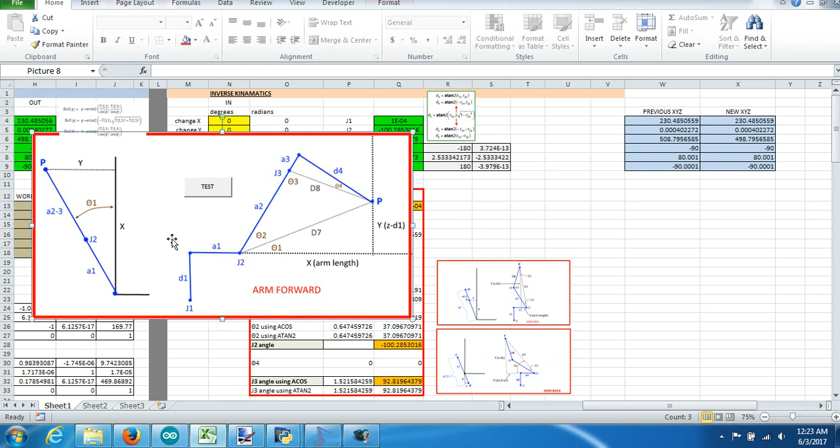So, move somewhere where it's not on the bottom. So this is kind of a wireframe version looking at our robot. If I'm looking straight down at my robot in this picture, I can see here's the center of J1. And if my robot is over at point P, then it's pretty easy to do some basic math to figure out what J1's angle should be. I can just use Pythagorean theorem, use X, use Y of my position. So J1, that one's super easy to get. I can get that pretty much no problem.

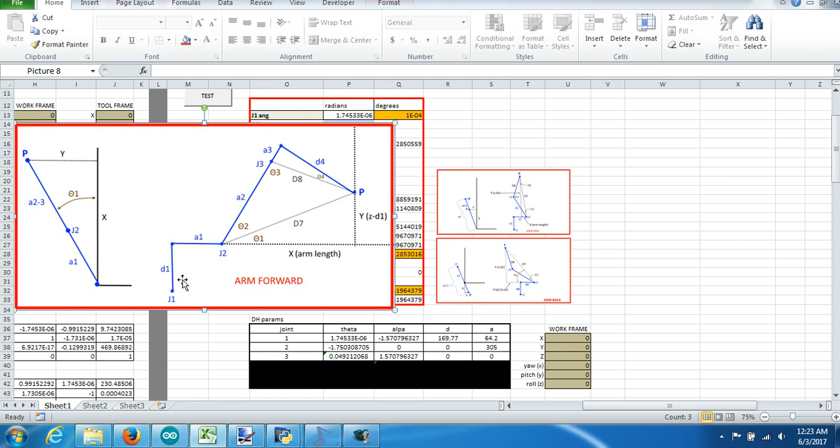Getting joints 2 and 3 is a little bit more difficult. I have to do some similar math, but now we're going to look at the wireframe model of the robot from the side. So if this is point P out here, then given that position, from this math equation earlier, we know that the x value is this arm length here, and then we can use various equations to figure out each of these different triangles.

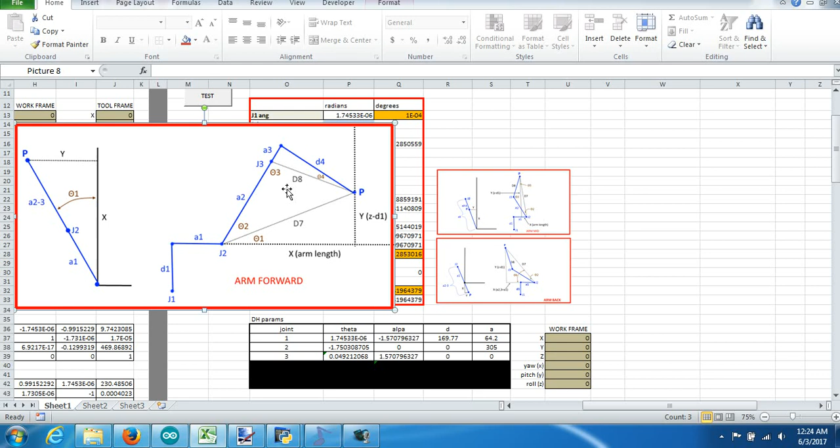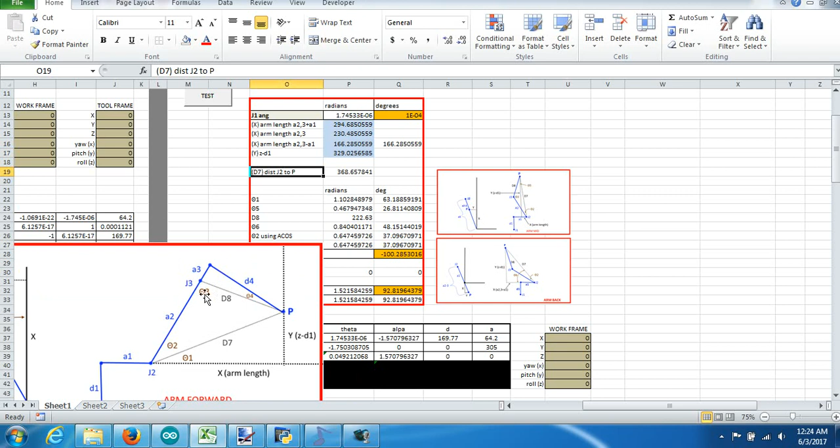Now I could probably spend a lot of hours going through every one of these formulas, but I'm gonna kind of breeze through this and just touch on it, because you can open up this Excel spreadsheet and look at each one of these. I have them all labeled so they match what's in the pictures here, and you can see how each of these angles is calculated. But before we get into any of this, I wanted to go through each one of these pictures, because there are different arm configurations. The math changes based on where the arm is.

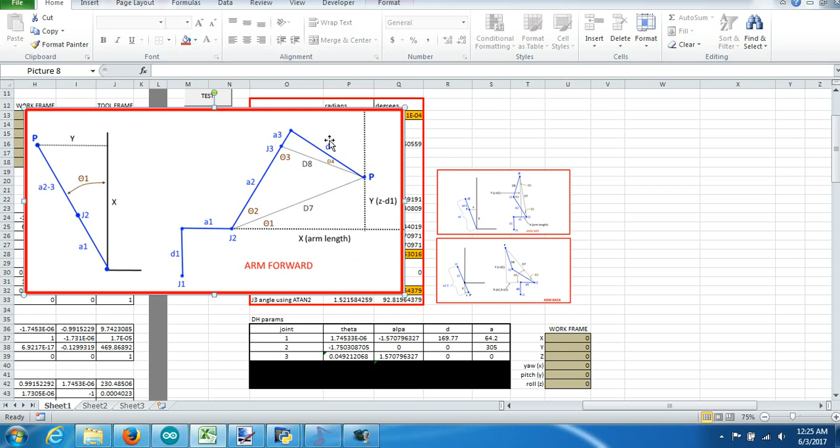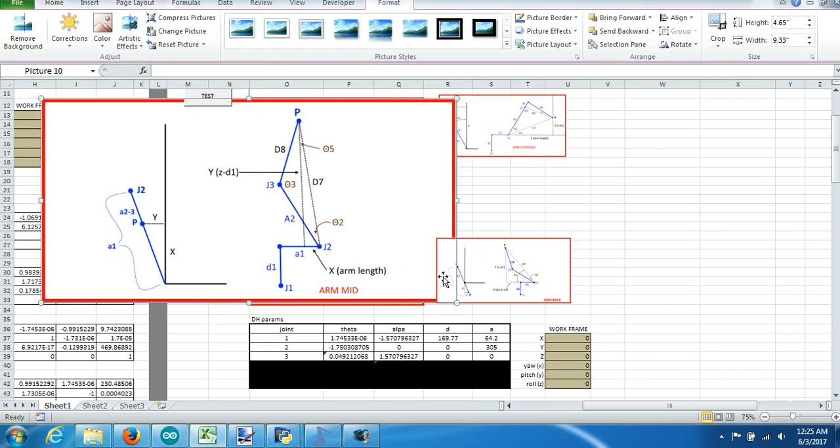So this is arm forward. With this model that I came up with, this is with axis 3, and basically the elbow and the wrist are out forward in front of the robot. So that's the forward configuration. The next one, let me blow this one up. So this one is arm in the mid position. It's a similar calculation, it changes a little bit, but the center point of the robot is now behind J2. You can see that straight line coming down. In this arm mid configuration, P is now behind J2, so that makes the math for finding all these different angles a little bit different.

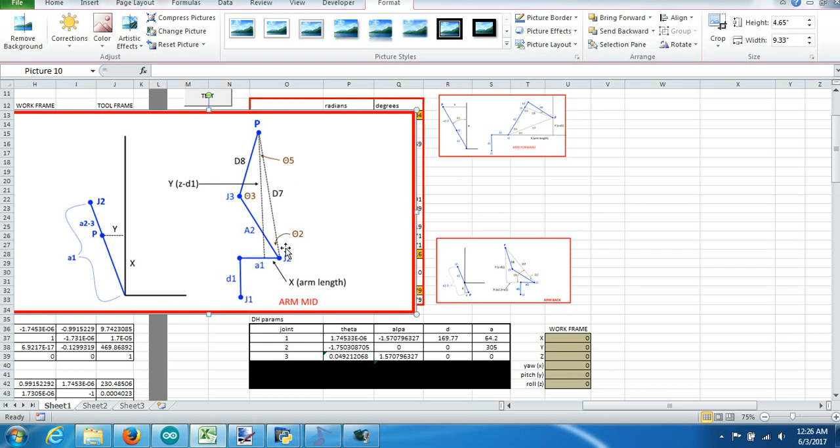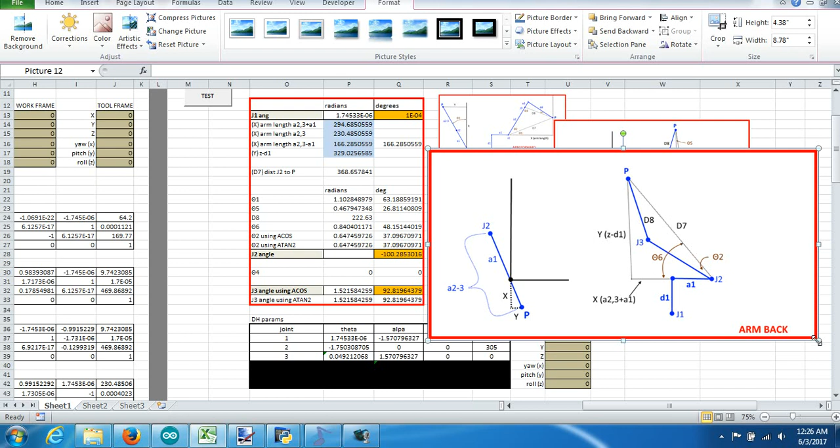And then over here, this is the arm back configuration that I came up with. Finding J1 is similar, just that you're going to find the X and Y over on this side this time. And then with the arm back, you've got P and J3 now behind J1. So now I've got a bunch of different triangles to solve for. You can see they're all marked here with theta 6, theta 2, D7, D8, J3. So you can look at these wireframe models and dig through all the math that I've done here, given that they're all labeled the same as the picture.

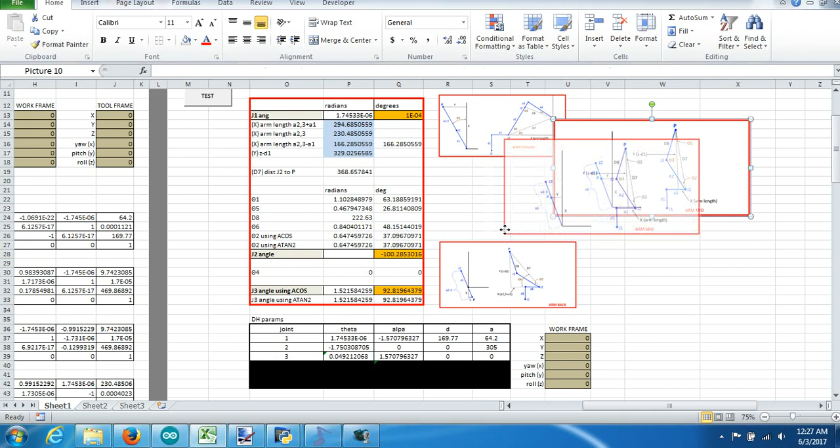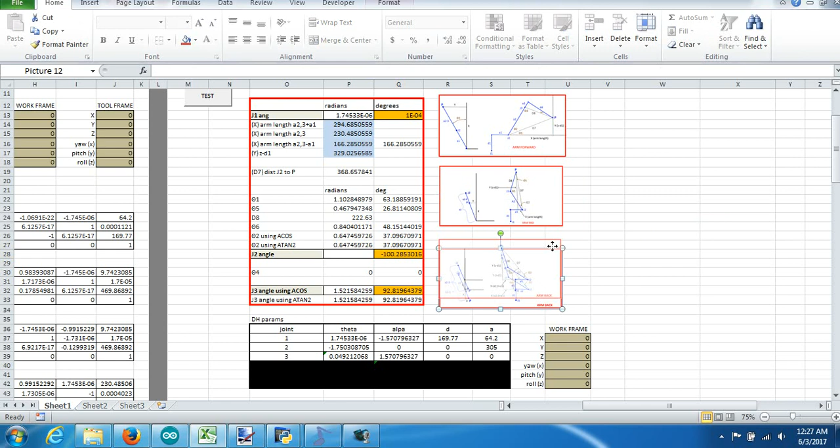One thing to consider here is these are just 3 arm configurations. What I did not do is an elbow back configuration. I didn't want to go to the trouble, and I've never had a need to run the elbow back. The elbow back configuration is if you were to take J3 and bend it backwards like that. That was a lot more complexity into the math, and I was just trying to get it working.

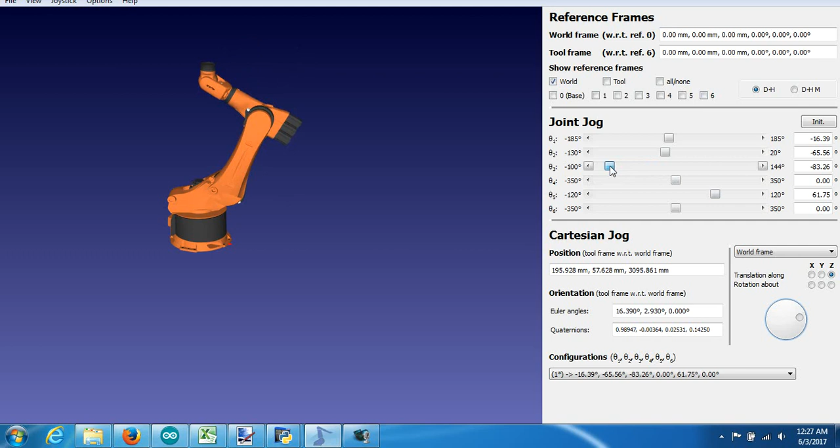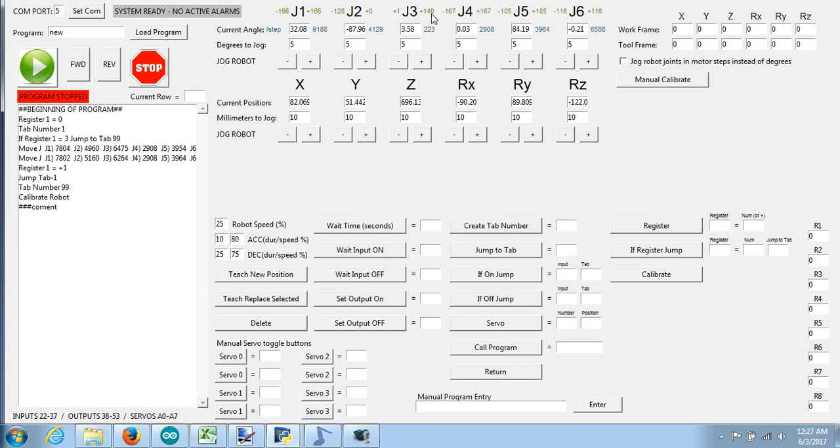So there is no arm back configuration, and you'll see in my program that the limit on J3 is +1. I don't let it go to 0. 0 is a no-no without doing some other calculations. So we got 1 degree all the way to +140, a reflection of the fact that I didn't do an arm back configuration in my robot. The other thing to consider is another value we need to know: the quadrants that the robot is in.

So over here, let me go up, find it. So these quadrants for J1, J5. So this quadrant basically calculates either quadrants 1 or 3 based off of, let's see here, excuse me, let me back out of there. So these quadrants are the way I split it up to be able to tell where the tool center point was in. So I have quadrants 1, 2, 3, and 4 for J1. That's how I tell which way the robot's pointed, whether the value is negative or positive for the J1 axis.

So for example, if my degrees are at, let's say, +5, I'm in quadrant 3. If I go to 95, I'm in quadrant 4. So in the world we live in, this is quadrant 3 for the robot, this is quadrant 4 for the robot, assuming that, let me center that, assuming that this square here that I'm drawing is the world that the robot lives in, and the very center is the center of the robot. When the robot arm swings over into this quadrant, that gives it quadrant 3. When the robot arm swings over into this quadrant, it's 4.

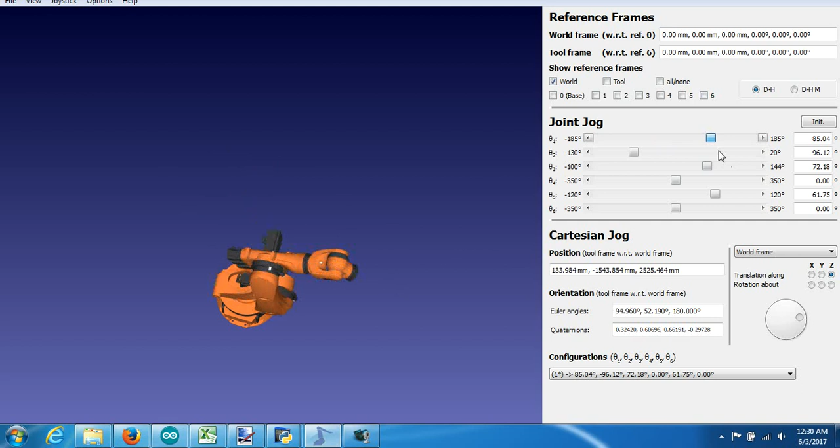Now if I went, say, -5, I'm quadrant 2. And then if I go -95, I get back into quadrant 1. So I'm using this value right here to tell me for my inverse kinematics what quadrant the robot's in. So if I looked at this from above here, basically that would be quadrant 1, quadrant 2, quadrant 3, and quadrant 4. So that's how that's used in the

calculation, and basically I just came up with some if-then statements based on the XY position and whether it's negative or positive. You can see that formula right here. It's pretty basic. Excel if-then statements are horrid to deal with, but once you figure them out, you can see what's going on. But basically it just sets the value based on some if statements based on if the x and y of J1 is negative or positive, and figures out what quadrant it's in.

And then this quadrant here for J5, this is trying to find what quadrant the tool center point is in. So you can open up that if-then statement, and it looks at the XY values, negative or positive, and tries to figure out which quadrant the wrist is in. And I use the quadrants for J1 on this model here. The quadrants for J1 are applied to the formula to find out if this angle is negative or positive. And then the quadrants for J5 are what I'm using to calculate whether it's arm forward, arm mid, or arm back.

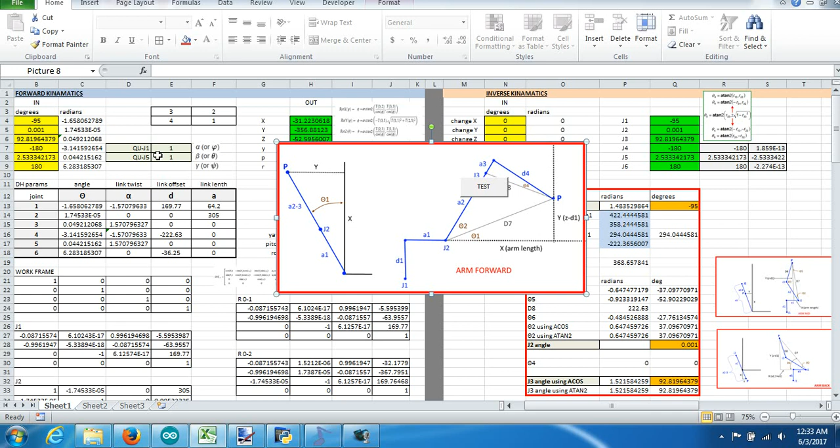So I'm slowly breaking it down. I use a few basic things in the forward kinematics to figure out where the robot's at. So you have to run the forward kinematics first, and then you run the inverse kinematics, because you need to know a few of these things before you run the inverse kinematics. So I'm using those quadrants against these wireframe models to do the math that is in this red box here. This red box tells us the value for J1 is going to come here, the value for J2 here, and the value for J3 right there.

So if we look at the math here, the radians for J1, we just get the xy, and then through this long series of if-then statements we just do Pythagorean theorem and figure out what the degrees are for J1 based on what quadrant we're in. So J1 is pretty easy. You can look at these two calculations here and see how they're being applied to each of these models based on which quadrant it's in to see how we're getting J1.

J2 gets a little trickier. You can step through here and see all the x arm lengths, the y, the d7, and see how each of these are being applied. But it's basically just using basic geometry, Pythagorean theorem, and then calculating through until we finally go through a series of if-then statements that are rather painful, to figure out which configuration we're in and which angles to use, which gives us the value for J2.